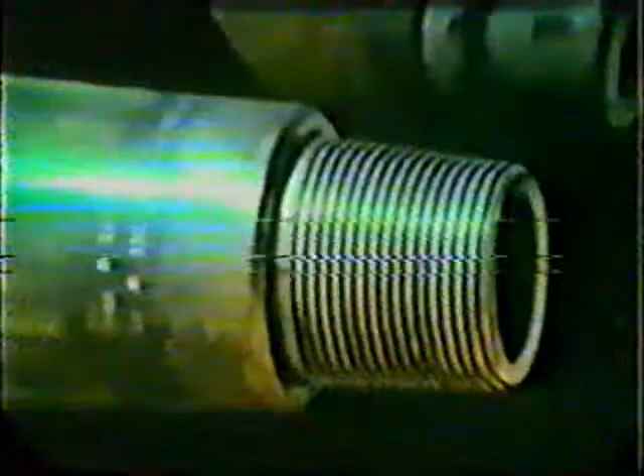You see, drill pipe and drill collar threads are precision equipment. They're often machined to 1/1000th of an inch tolerance. Damage here before the pipe ever gets in the hole probably means a lot of trouble later. So keep those protectors on.

As for unloading, how many of you do it this way? Simply pulling the chocks and letting the pipe roll off the truck is fast, but the pipe can run wild, get bent, or suffer thread damage. Also, it's real easy for somebody to get hurt.

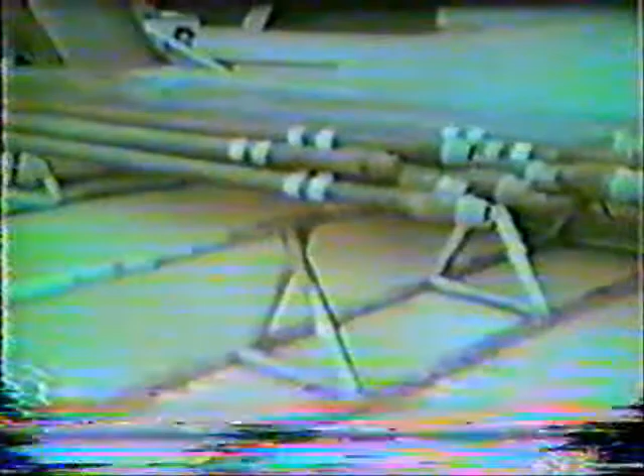Here's a better way. A forklift can pick up several joints off the truck with not too much banging together. All the joints are under control as the operator moves them to the pipe rack. The pipe is lowered to the rack with little chance of damage to the pipe, and the chance of injury to a person is minimized.

The second step in getting longer life from your drill string is clean threads on the tool joints and drill collar connections. A grain of sand or a metal filing can damage the threads. So clean the pin end with a solvent and bristle brush. Don't use a wire brush because it can cause damage.

Once it's clean, really eyeball it for damage.

Also, clean the thread protector before it's put back on the pin. Not a whole lot would be gained by cleaning the threads, only to use a dirty protector. After it's clean, put the thread protector back on.

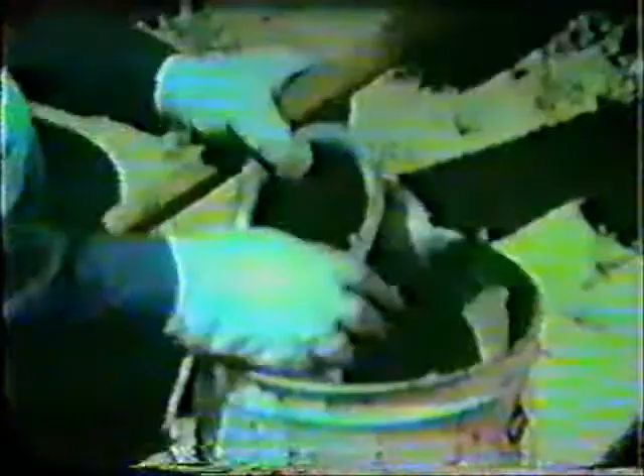Now clean the box end. Again, use a bristle brush instead of a wire brush. And don't forget to clean the box-end thread protectors. Once clean, put them back on.

Next, look for damaged pipe. This joint is as crooked as a dog's hind leg, so set it aside.

But some types of damage can be repaired. For example, this shoulder can be fixed. File the high spots down, removing as little metal as possible. Touch up all the way around to ensure a good, flat sealing surface.

Use a flatness ring to check the shoulder for low spots. Low spots could cause the shoulder to leak, the threads to wash out, and the joint to fail.

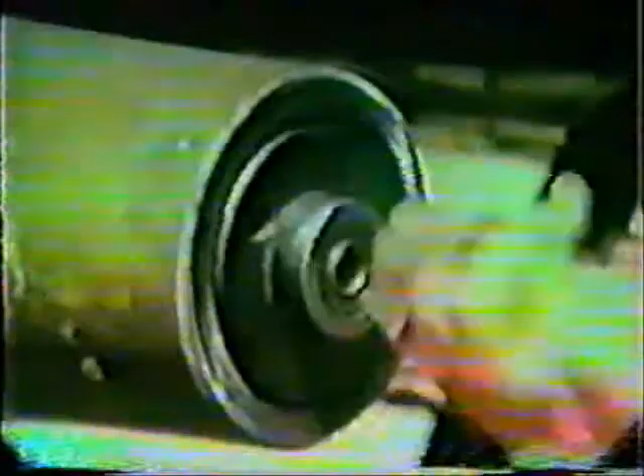You can also use a power grinder on damaged shoulders. First, screw a guide into the box. Then put the grinder shaft into the guide and start the grinder. It's not long before you've got a good shoulder.

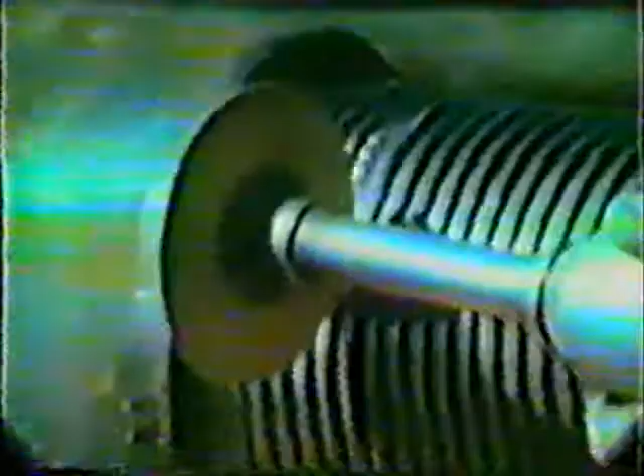This pipe is designed to minimize the problem. Notice the long tool joints and the bulge in the middle. When this heavy wall pipe is placed in the string above the drill collars, it smooths out the whipping action and should reduce failures in this part of the string.

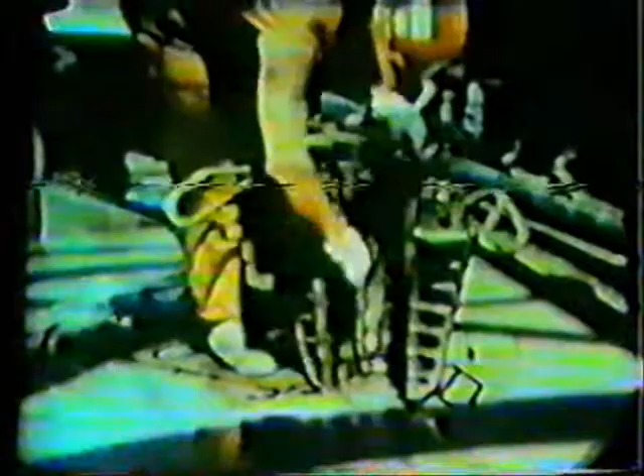Another thing that can prevent pipe damage is maintenance of your pipe handling equipment. Take the slips, for instance. Check them frequently to be sure the teeth or gripping elements are in good shape and properly installed. If the teeth are worn, damaged, or improperly installed, they can score the pipe. This sort of damage can lead to a break and a fishing job.

Also, be sure to use the right size of slips. For instance, if you're running 4.5-inch drill pipe, make sure the slips are usable with pipe of that size. The same thing holds true for the drill collar slips.

Periodically, check the slips. Simply wrap the test paper around the pipe, and carefully set the pipe on the slips. Then pick up the pipe and pull the slips. Look at the test paper. In this case, the even marks on the test paper show that the slips are okay.

After the slip test, check the master bushing. What he's looking for are signs of wear like gouges or worn spots. Here's a master bushing in orange that's in good shape. The slips in yellow evenly contact the sides of the pipe. No problem here. But here, the master bushing is worn. The top of the slips wedge inward and bottleneck the pipe.

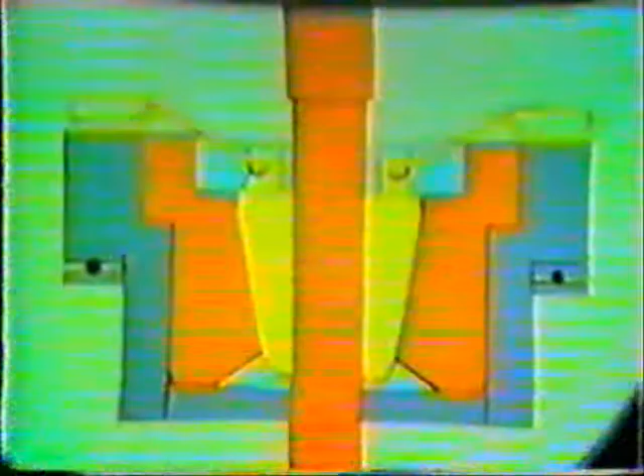Bad news. More bad news can occur if the inside of the rotary table is worn down. So, while the master bushing is out, check the rotary for wear. Here again is a table with everything in good shape. But with a worn table in blue, once again you can get bottlenecked pipe. So it pays to check out your rotary from time to time to get long life from your string.

With your rotary in good shape, and with your pipe and collars clean and inspected, you're ready to go in the hole.

First, make sure the catwalk is clean. You don't want any junk or iron on there that could damage the drill collar. Roll the collar off the rack and onto the catwalk. Notice that the thread protectors are on.

Pick up the collar into the V-door. Be very careful not to let the collar get away from you so it won't hurt someone or get damaged by banging into the rig. Sure glad the thread protector is on.

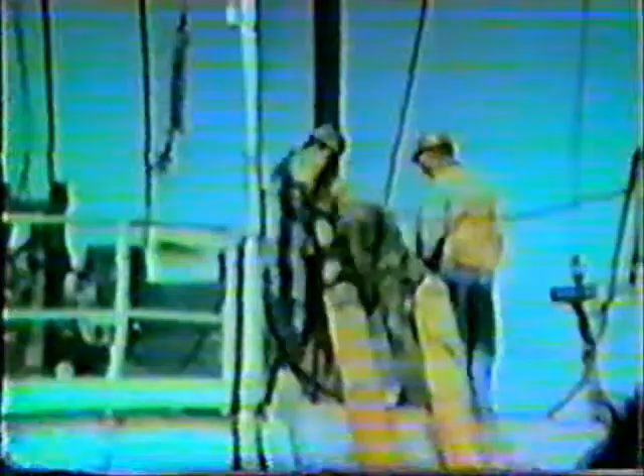With the collar in the V-door, make up a lifting sub. Latch on the elevators and lift the collar onto the floor. A piece of soft line across the V-door helps in keeping the collar under control when it reaches the rig floor.

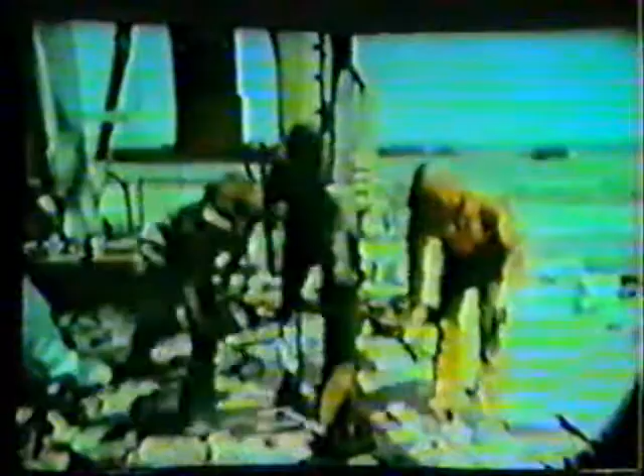After the bit is made up, focus your attention on the best rules to follow when making up the collars. Lower the collar into the hole and set the slips. Attach a safety clamp. The clamp keeps the collars from falling into the hole if the slips fail. Next, break out the lifting sub. As you set it back, use a little care to keep it from being damaged.

Be selective about the dope or thread lubricant you use. This batch has metallic zinc or lead in it to give it body. The dope has to be spread liberally over all the threads and on the shoulder to ensure a good leak-proof joint.

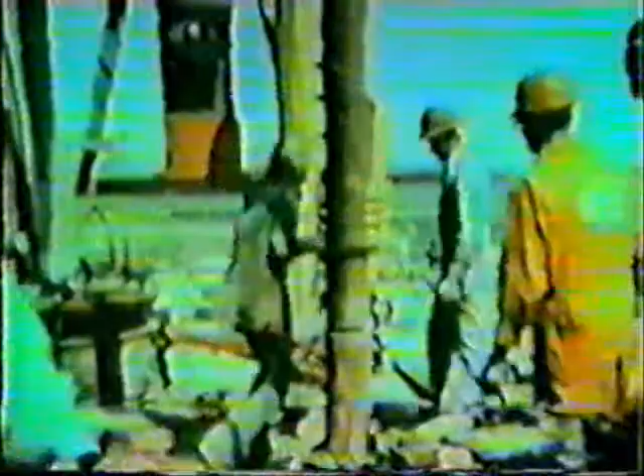Be really careful when stabbing collars. Bouncing thousands of pounds of drill collars together at the joint can lead to trouble. Walk the collars in with chain tongs. This way you don't run the risk of ruining the threads. Using a spinning chain or the rotary to spin up a collar makes it spin too fast and can gall the threads. Of course, to buck up the collar to final torque, latch on the regular tongs.

Exact tightness is important, which is why you should use a tong torque gauge. If the connection is too loose or too tight, the collar could be damaged. When handling drill pipe, the same sort of care pays off too.

For example, when tripping pipe, wait until it stops moving before setting the slips. If you don't, the slips can gouge the pipe and lead to a fishing job.

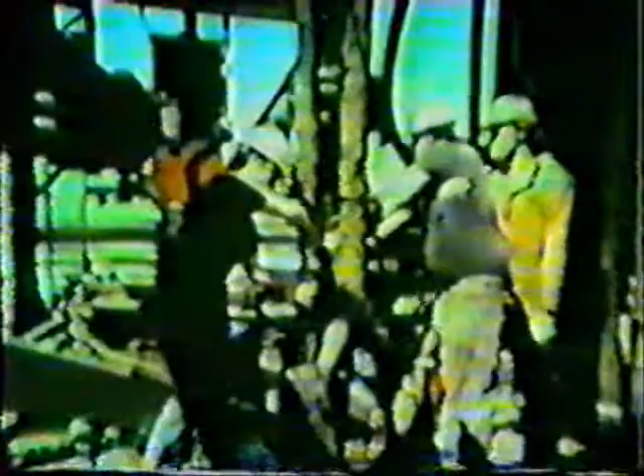Next, dope the joint. And latch on the backup tongs. Be careful when stabbing. Do not drop the pin on the shoulder. Instead, make a good stab with the pin going right into the box.

Spinning tongs are real handy to use to spin the joint up. The makeup tongs are used to buck up the joint to proper tightness. Here again, a torque gauge is real handy in getting the proper makeup torque.

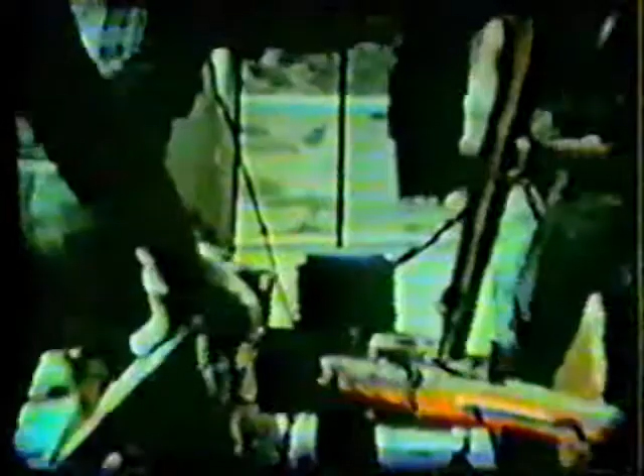Going in the hole, this crew really knows what they're doing. Let's watch. Good, he doped the threads. Good stab. After spinning it up here with a spinning chain, they use both sets of tongs. They don't use the rotary to hold the pipe stationary or to spin it up.

If the rotary were used to spin up the pipe, this is what can happen. If the pipe turns in the slips, it creates deep scars just waiting for a chance to part and create a fishing job.

Be careful, too, when making up the Kelly. For example, worn threads on the Kelly sub can do an awful lot of damage, since the sub mates with every joint that goes in the hole.

If you've handled your pipe correctly, then you shouldn't have any pipe problems downhole as you drill.

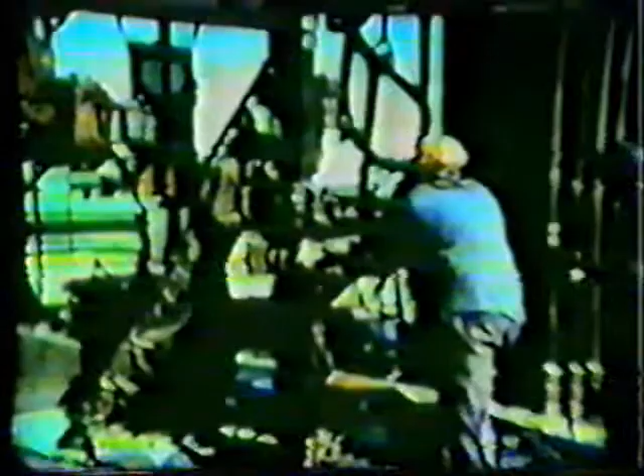When coming out, just as when going in, set the slips only after the pipe stops moving. That was pretty fast, but was the pipe really stopped? Use both sets of tongs to break out a stand. Once loose, spin the joint out.

When the threads disengage, lift the tool joint pin clear of the box and set it back.

Be careful not to let the stand get away from you. Also, make sure the setback area is clean and free of debris that could damage the pipe. Another thing, if you have to move a stand once it's set back, use a special pipe lifting tool to do it. It'll prevent damage to the shoulder.

As you break out the pipe, be kind of like the old Indian scout. Look for signs of trouble. For instance, this joint's kind of hard to spin out.

So the crew cleans the pin to look for problems. And as you can see on the shoulder of the joint and the rotary, the dope was forced out by drilling mud pressure.

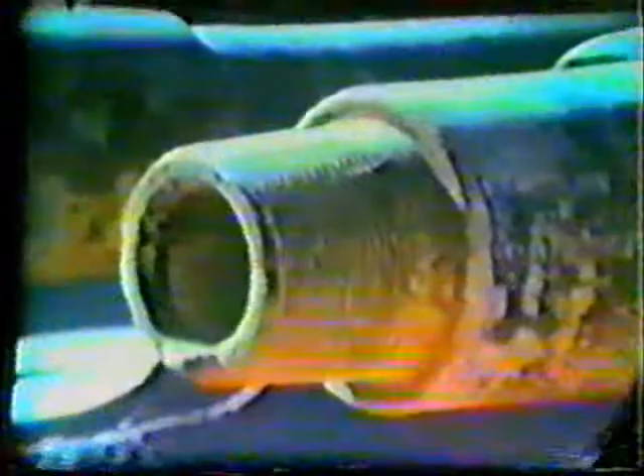This is what could happen, a washed out thread. You can avoid this by making up your pipe and collars to the correct torque.

Here's another sign of trouble. A messed up shoulder. This damage could cause a washout or, worse still, a break. Don't run a damaged joint into the hole.

Here's a stretched pin. You can see that a thread gauge doesn't fit in the threads, a sure sign of stretching. Proper makeup torque prevents this problem.

When the well has been drilled to final depth, take care when laying down the string.

With this laydown system, the pipe is hoisted up and the crew swings it over to rest in a padded bucket.

Then the joint is carried out the V-door and goes down a wire line to the rack, ready for hauling to the next job. Pretty nifty laydown system because it's fast and prevents damage to the pipe as it's being laid down.

So there's no doubt that good handling of the drill stem pays off. With everyone from the drilling superintendent to the tool pusher, driller, and the crew doing their job well, your motto can truly be, no fishing this year.

The term fishing comes from the early cable tool practice of probing with a hook to catch a broken drilling line in hopes of retrieving the drilling tool attached below.

On modern rigs, fishing is the art and science of removing broken or stuck equipment or small non-drillable materials from the wellbore.

A fish can be anything from part or all of the drill string to bit cones, pieces of tools, any material accidentally dropped in the hole, or even small pieces of naturally occurring iron pyrite.

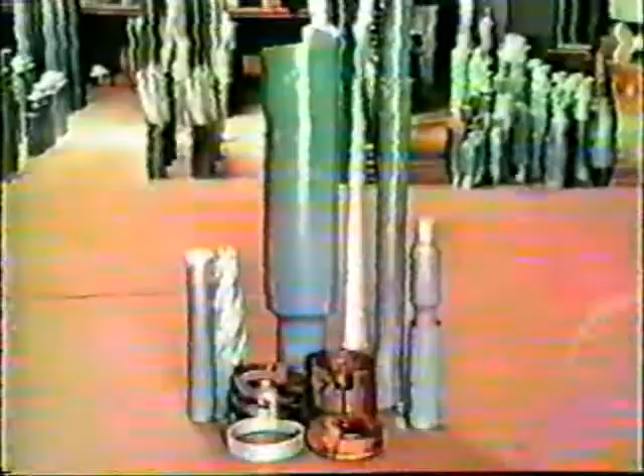There are many types of fishing tools. Which tool to use depends on the kind of fish in the hole and the downhole condition. Every fishing job is unique, and to cover all aspects would take more time than allotted here. So only some of the more commonly used fishing tools and practices will be discussed.

Poor boy junk baskets are just one of the many tools employed to retrieve small pieces of equipment, that is, junk, from the hole. While being rotated slowly and applying weight, the fingers bend inward to trap the junk inside.

The junk sub, or boot basket, will retrieve small pieces of junk. It's usually run just above the bit during normal drilling and milling operations.

The junk is stirred up by the mud stream and rises to the area above the basket. In this area, the mud stream widens, slows down, and can no longer carry the larger pieces. So the junk falls in the cup and is retrieved when the bit's pulled.

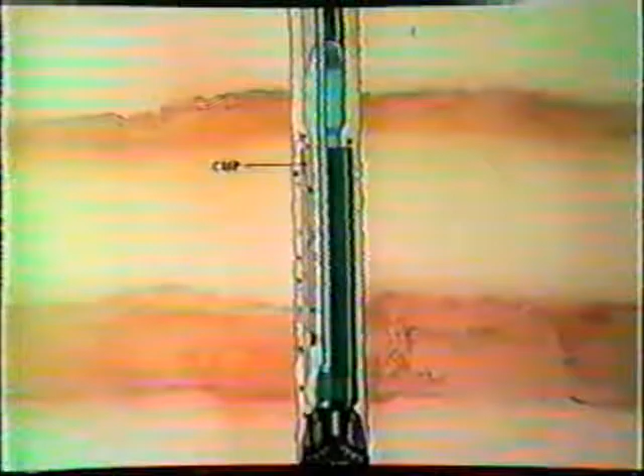A jet-powered junk retriever is more effective when the junk's too large for the cup in the junk sub. The retriever is run to within a few feet of bottom with circulation and rotation to clean cuttings off the top of the junk.

Then a ball is pumped down the drill string. The ball shears a pin to divert drilling fluid out jet nozzles. This action causes a pressure drop or vacuum inside the tool.

The tool is then rotated slowly to bottom and raised and lowered several times to stir the junk up. Finally, it's lowered over the junk. The lower pressure inside the tool causes mud outside to rush in the bottom of the tool and lift the junk. Folding fingers permit only one-way passage of the junk to the inside of the tool.

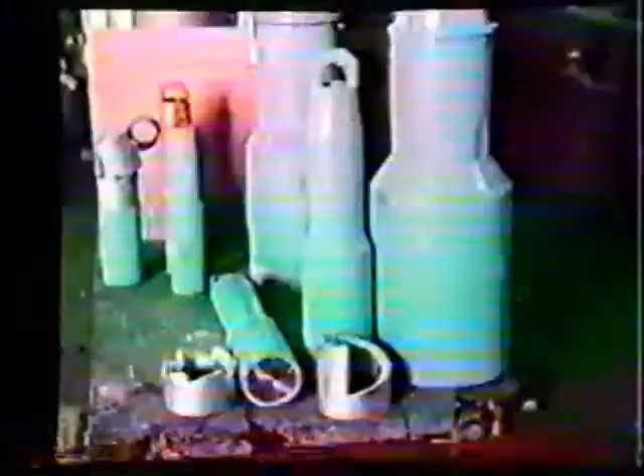Fishing magnets are helpful when small metallic pieces must be retrieved. The permanent magnet picks up junk as cuttings are circulated off the top of the junk.

When junk is large or oddly shaped, a jet bottom hole cutter may be needed. The tool contains a shaped explosive and is lowered to the junk on an electric line. When detonated, high-velocity gases break up the junk, which is then recovered with one of the conventional junk retrieving tools.

A common fishing job occurs when drill pipe parts during drilling. This type of break is called a twist-off, and usually results from metal becoming fatigued due to the constant bending and torquing of the pipe.

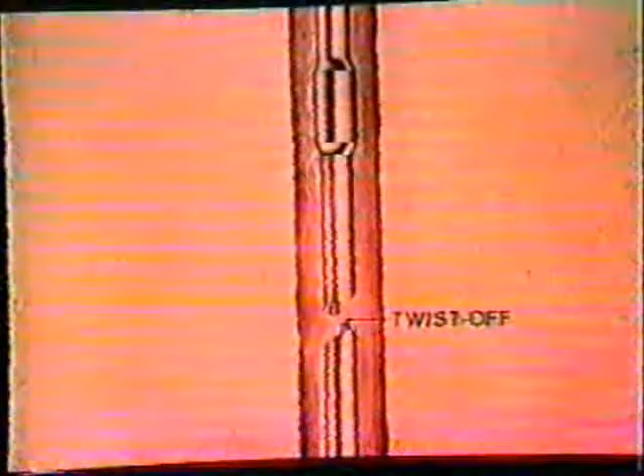When a twist-off occurs, the pipe above it is tripped out and measured. It would be measured under tension while being pulled so that the depth to the top of the fish can be accurately determined. It's not necessary to run an electric log to locate the top. An inspection of the break gives a good reverse image of what the top of the fish looks like.

The top of a burred or split fish should be milled down, preferably to a thicker portion such as a tool joint. It requires great care and exact knowledge of the depth to the top of the fish to prevent the mill from bypassing the fish and damaging the pipe below.

Mill cutting surfaces are inlaid with very hard tungsten carbide. The configuration of these mills gives an indication of how they are used.

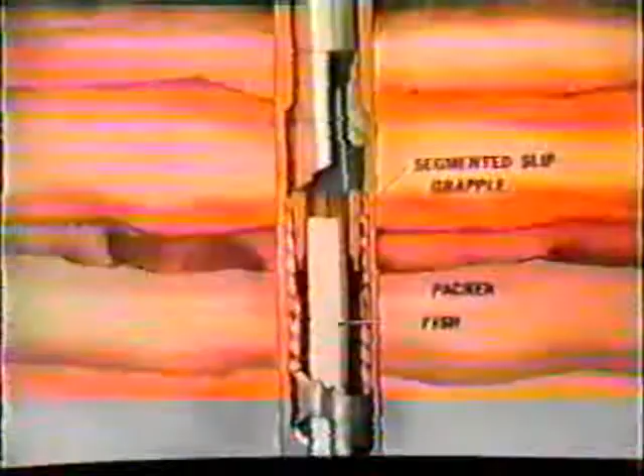When the top of the fish is fairly smooth, a releasing overshot is run below the drill collar string. It should have a large bore so other tools can be run through it and into the fish below. The fish is caught and held by segmented slip grapples, as shown here, or by spring-type grapples. A packer seals between the fish and tool so mud can be circulated through the fish.

The overshot can be released from the fish if the fish is stuck and can't be pulled.

If the fish is burred or flared, it may be necessary to use a mill insert in the overshot to clean up the top of the fish.

Careful measurements are taken to determine how far the fish must extend into the tool before it can be caught by the grapple. The guide helps center the fish under the tool.

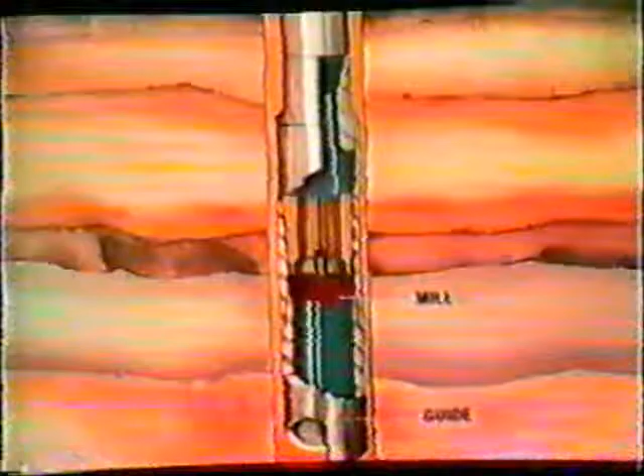It's good practice to run a hydraulic jar with a large bore just above the overshot in case the fish gets stuck during fishing operations. The jar's length should be added to the overall measurement of the fishing tool assembly.

Also, a jar accelerator may be installed above the drill collars to dampen the jarring effect on the derrick and increase the magnitude of the blow delivered to the fish. Accelerators and jars later.

We've now assembled a safe, basic string to fish for parted drill pipe. From top to bottom, there's drill pipe, a jar accelerator, drill collars, a jar, and a releasing overshot.

Catching the fish may be as simple as lowering the overshot with rotation to the right over the fish, then raising it so the grapple will move down to wedge against the fish, and circulated to condition the hole before the fish is pulled out.

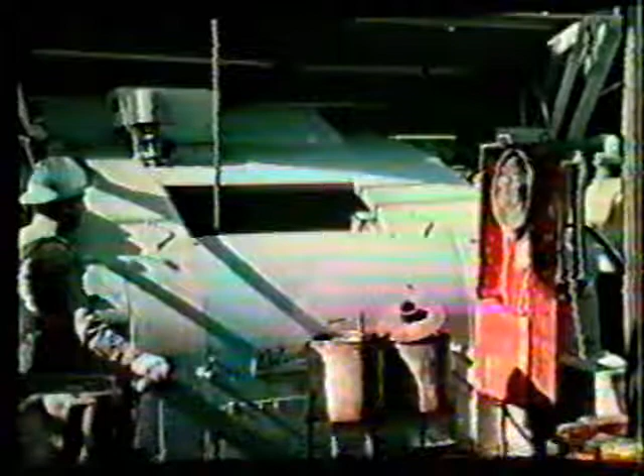On the other hand, it may require hours of patient raising, lowering, turning, and feeling with the fishing assembly. Impatience and rough handling can damage the top of the fish. Under these conditions, accurate measurements taken of the fishing assembly help to determine whether the tool is passing by the fish or if the grapple is not holding.

The problem may be that the fish has parted in a washed-out section of the hole or has fallen behind some obstruction. After a period of fishing with the overshot, it's possible to fairly well determine if this is the case. If so, alterations must be made to the fishing assembly.

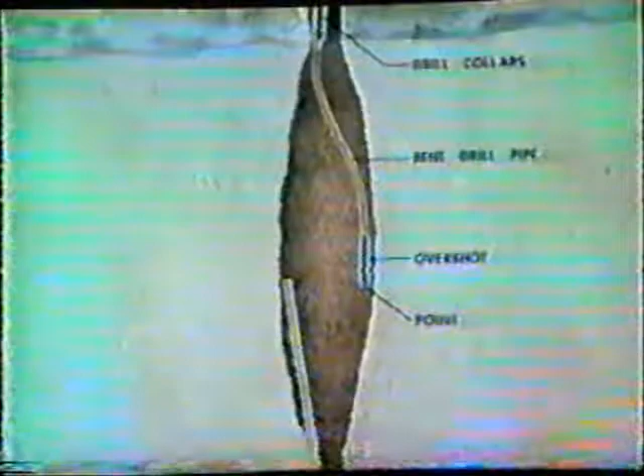The first and least expensive alteration is to put a double bend in a joint of drill pipe and run it in the string between the drill collars and overshot, with the point on the guide to the high side of the bend. By repeatedly raising the assembly, turning it, then lowering it, the entire circumference of the hole can be investigated.

Otherwise, a wall hook guide may be run below the overshot. It's rotated slowly and carefully lowered until it tags the fish. Then the string begins to torque up as a result of the fish binding in the wall hook opening. When this happens, the rotary table is locked and the fishing assembly raised until the torque is released. When the torque releases, the top of the fish should center up under the overshot.

Now the assembly is lowered and the fish engaged by the overshot. Here also, accurate tool measurements help position the assembly for the catch.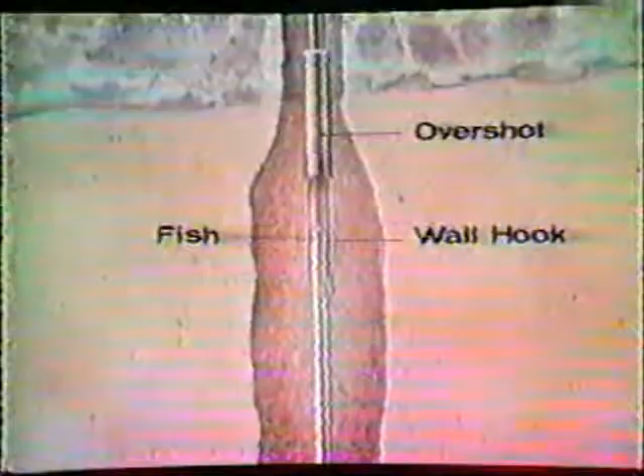If the cavity is very large, a hydraulically actuated knuckle joint may be needed to extend the wall hook and overshot out into the cavity. Most knuckle joints require dropping and pumping down a restriction plug to activate the knuckling action. After the fish is engaged, the plug is retrieved with a wireline overshot.

Once the fish is caught, the hole is circulated clean before starting out of the hole. If circulation can't be fully established, it's almost a sure bet that cavings and cuttings have stuck the fish. Here's where our insurance, the jar and accelerator, pays off.

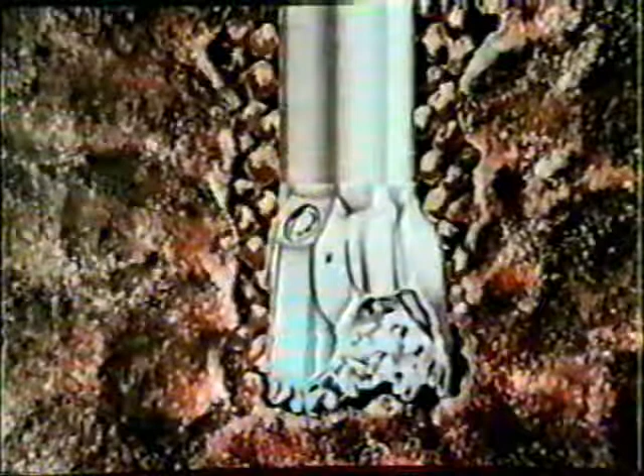Drill collar weights set down on top of the fish to cock hydraulic jars. Then a moderate pull is taken on the fishing string.

Stretching the string compresses trapped gas in the jar accelerator, momentarily storing high-intensity energy. The gas is compressed by the piston as the string is pulled upward.

At the same time, the upward pull on the string causes oil in the hydraulic jar to seep between a piston and sleeve. The sleeve restricts the first few inches of travel, but once the piston is pulled beyond the sleeve, there's little restriction. So the stretch in the fishing string, aided by the compressed gas in the jar accelerator, snaps the drill collar mass upward.

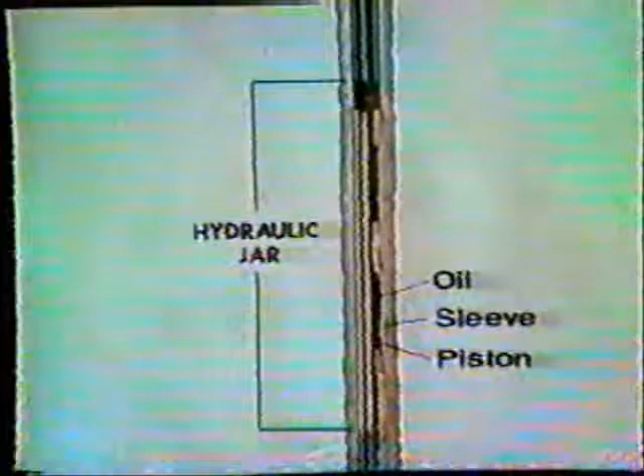Jarring the stuck fish upward when the mandrel knocker strikes the knocker sub. Then weight is again applied to the jar to recock it for another blow.

If jarring doesn't free the fish, the next step is to find out where the fish is stuck. The caution about not running fishing tools with little or no internal restrictions pays off here, because now we must go through them to the inside of the fish to find the stuck point.

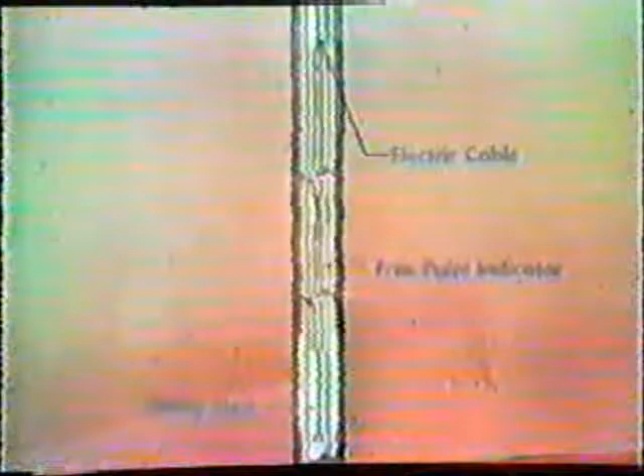A free point indicator with a string shot is run inside the fish on electric cable. At various intervals, the assembly is stopped and the drill string is stressed by applying torque and tension.

When the pipe is stressed, the indicator detects the rearrangement of the pipe's molecules. A surface instrument indicates the change either visually or audibly. The stuck point is the point where no molecular change or stress is indicated.

The string shot is positioned opposite a tool joint, some 1 or 2 joints above the stuck point, and left-hand torque is applied to the drill pipe.

The shot is fired to loosen the joint, and the left-hand torque backs off the upper portion of the drill string. The back-off should always be made a joint or 2 above the stuck point, so enough pipe is exposed to act as a guide and to ensure a clear, clean connection for subsequent fishing tools.

Shot, and then the freed section of the fish are pulled.

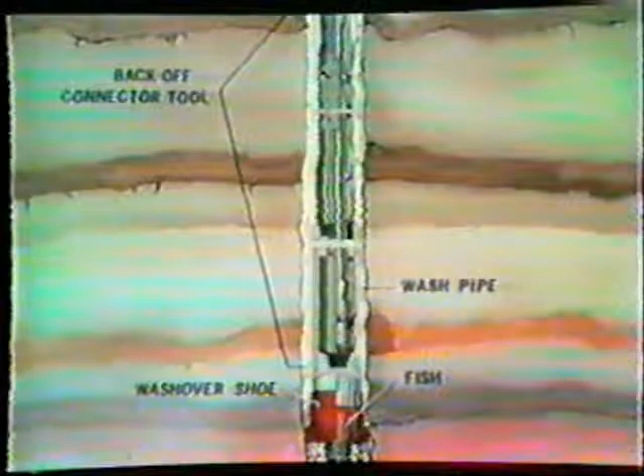To retrieve the rest of the fish, a washover string is run. One type consists of a back-off connector tool and a length of near hole-size wash pipe. A washover shoe is made up on the bottom of the wash pipe and is used for drilling.

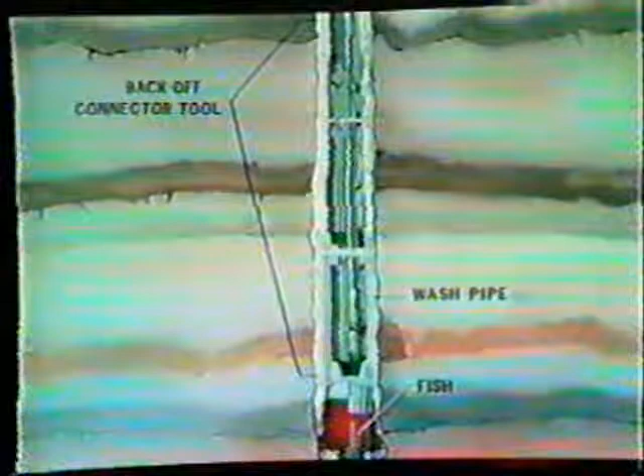The wash pipe assembly is lowered over the fish while rotating and circulating as in normal drilling. Washing over progresses the full length of the wash pipe until the back-off connector tool engages the top of the fish. If all the fish has been washed over, the hole is conditioned and the fish pulled.

If there's still more fish to be washed over, a tool joint locator and string shot are run to a point one joint above the bottom of the wash-over shoe and the back-off is performed. Then the washed over section is pulled. This washover, back-off, and pulling is continued until the entire fish is freed.

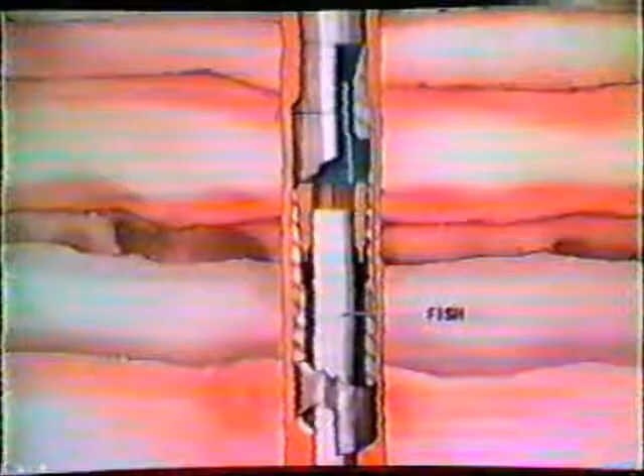Now let's go back to the point where the fish was first caught with an overshot and say that circulation was established, but the fish is stuck and can't be pulled. Probably the fish is wall stuck, because that's the most prevalent type of sticking where circulation is not impeded.

Wall stuck pipe occurs where the hydrostatic pressure of the drilling mud is greater than the formation pressure. The greater hydrostatic pressure moves the drill pipe to the side of the hole and the liquid part of the mud into porous formations, leaving a mud cake that builds up around pipe. This wall cake, plus the differential pressure, can stick pipe.

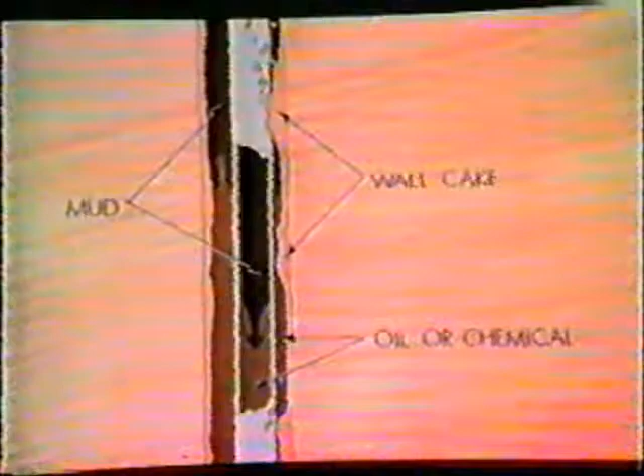Preparations should be made to spot oil or a commercial chemical around the fish, which will penetrate between the pipe and the wall of the hole and break up the wall cake. Usually, the drill pipe is filled with the oil or chemical and moved down the pipe every 30 minutes by a few strokes of the mud pump.

If oil spotting and jarring doesn't free the pipe within about 48 hours, the stuck point is located and the freed portion of the fish backed off and pulled. Then washover operations commence to retrieve the rest of the fish.

If a drill collar parts, the collar string can usually be fished out with an overshot. However, it may be necessary to use a fishing tool that goes inside the fish, should the fish be only a fraction of an inch or so smaller than the wellbore.

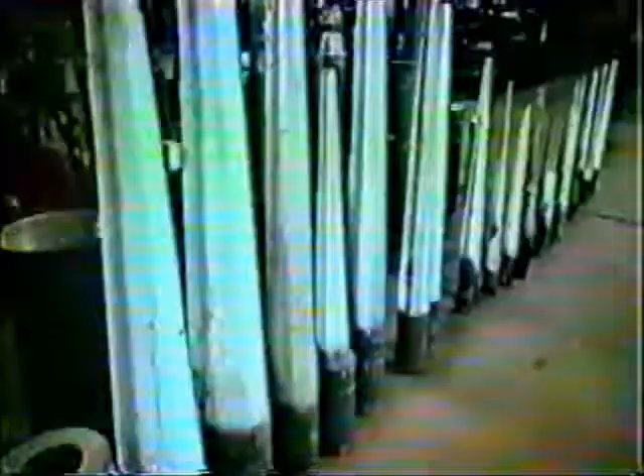The simplest inside fishing tool is the taper tap. Lowered into the collar bore, it's slowly rotated in the proper direction to make its own threads as it engages the fish. Some taps have open tips for limited circulation. None will allow a free point indicator to pass. Also, it should always be run with a safety joint.

A safety joint is a two-piece sub made up with large, specially designed right-hand threads. Rotation to the left, combined with an upward pull on the string, will back it out. With its safety joint engaged, the fish can be pulled.

But if the fish is stuck and jarring doesn't free it, the fishing assembly is broken out at the safety joint and the fishing string pulled, leaving the taper tap and part of the safety joint in the fish. A washover job can be done.

Another inside fishing tool is a releasing spear. It is lowered inside the fish until the bumper ring above the slips contacts the fish. Left-hand rotation, combined with an upward pull, causes the spear slips to expand and wedge into the fish for retrieval. The spear can be released from the fish at any time by applying downward weight and right-hand rotation.

Fishing for stuck pipe does not always occur when the bit is on bottom. Pipe can become stuck off bottom during a trip, or drill collars can be pulled into and stuck in key seats.

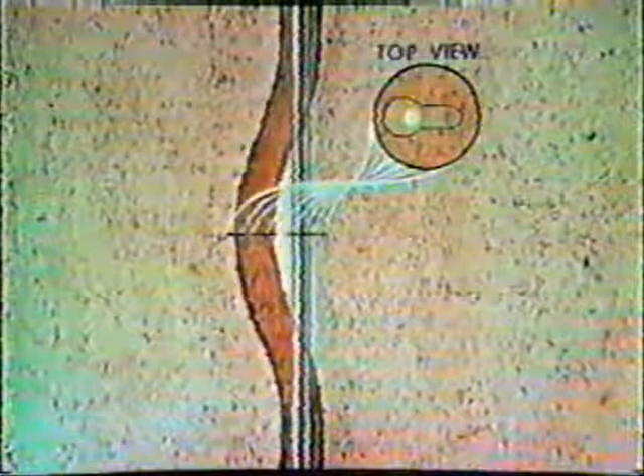Key seating is the result of drill pipe under tension wearing a slot into the wall of a crooked hole. The slot is usually smaller than the main bore hole, and drill collars can't pass through it. If the driller is not careful, he can jam the top collar into the key seat so tightly that any amount of weight applied will not make it drop free.

If this happens, a back-off is made 5 or 6 joints above the stuck point. The back-off is made well above the stuck point so that the top of the fish is in the main bore hole and out of the key-seated portion of the hole. This is done so that the fishing tool can be placed on the fish in the normal part of the hole.

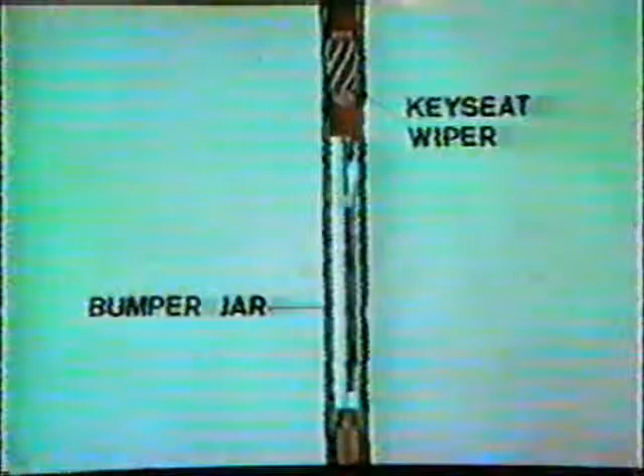Since the fish has an undamaged tool joint looking up, a bumper jar and key seat wiper may be run and made up in the fish. Once engaged, the body of the jar is raised the length of the jar mandrel, then suddenly dropped to strike a downward blow.

Jarring does knock the fish free. The string is lowered with rotation so that the blade reamers on the wiper ream the key seat out. Then the collar string will pass through on the trip out.

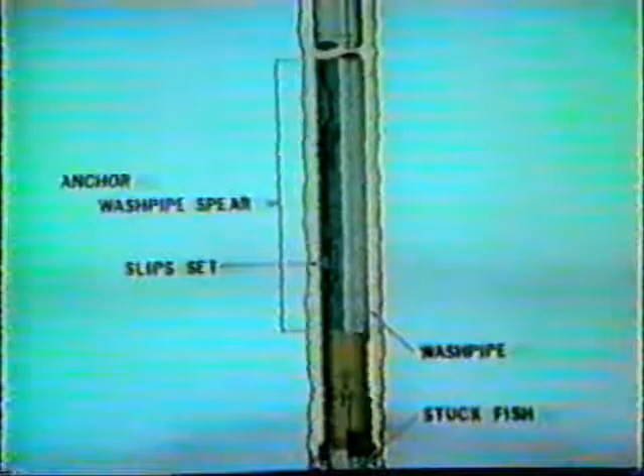If jarring does not free the collar string, it'll be necessary to perform a washover. Since the fish is stuck off bottom, an anchor wash pipe spear can be used to prevent the fish from falling once it's washed free from the key seat. The anchor spear is latched inside the wash pipe by means of slips. It remains latched until it's made up on the fish at the beginning of the washover job. When the spear is made up on the fish, the slips release from the wash pipe. Washing over continues until the fish falls free. When this occurs, the slips again expand to grip the interior wall of the wash pipe to prevent the fish from falling out of the wash pipe to the bottom of the hole.

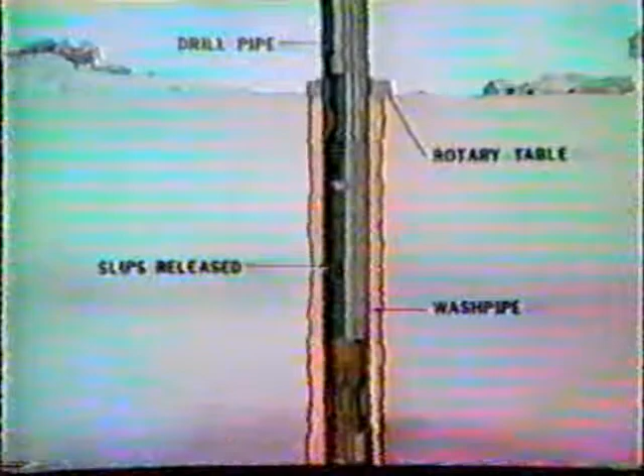If the entire fish can't be retrieved in one washover job, then a back-off is made above the stuck point and the wash pipe is set in the rotary table. Drill pipe is run down to and made up on the spear. The spear is raised to release the slips, and the spear, with the backed-off portion of fish attached, is pulled out of the wash pipe. The wash pipe remains in the hole, and the spear can again be run to retrieve the rest of the fish.

Sometimes, after a back-off has been made above the stuck point and the freed section of pipe pulled, the inside bore of the fish, still in the hole, may become plugged by cavings and settlings. This makes it impossible to go back inside the fish to make further back-off and pulling operations. Should this happen, a drill-out tool can be used to reopen the fish.

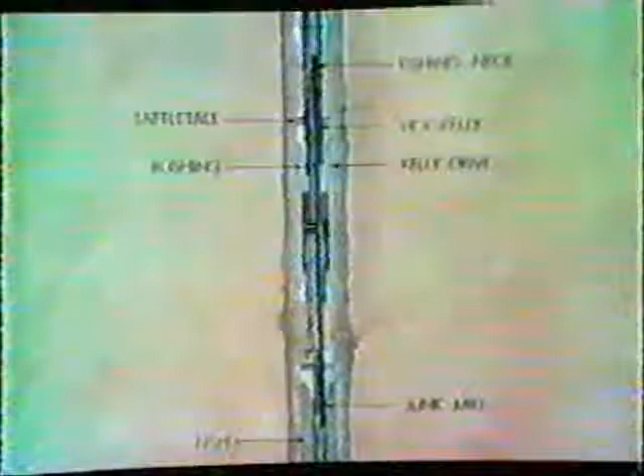The drill-out tool is run to the top of the restricted fish and made up on it. A hex kelly is run in on wire line. It is inserted through a self-aligning bushing which is built into the kelly drive. Rotating the drill string causes the kelly and mill to rotate also.

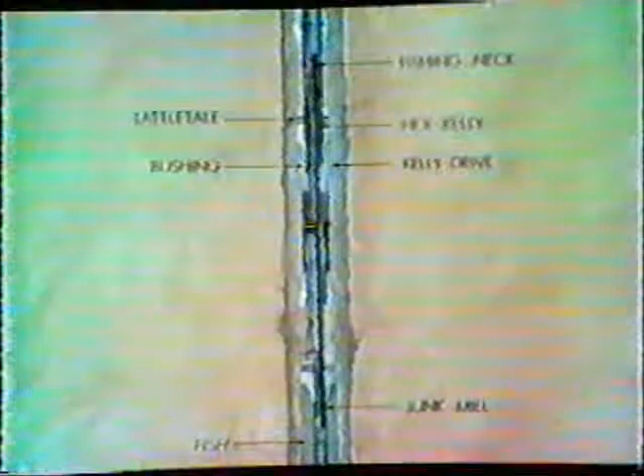Pump pressure is applied to wash the cuttings and apply weight on the mill. When the kelly has drilled all the way down, drilling fluid will exit through the tattletale and cause pump pressure to drop. If there's more debris to be cleaned, the kelly can be retrieved by wire line and a pup joint, or short length of drill pipe, made up between the kelly and mill. This assembly can then be run back in and milling resumed until the restriction is removed. Then the mill and hex shaft are retrieved with a wire line overshot, leaving behind the outer case of the tool still attached to the fish. Normal back-off procedures can be performed to retrieve the rest of the fish.

If a drill-out tool isn't available, a plugged fish can be retrieved with an external cutting tool. The cutting tool is run on the bottom of the wash pipe. Enough wash pipe is used to get below the obstructed fish. During the washover, the cutting tool is slowly raised until a bottleneck, or as in this example, spring dogs, engage a tool joint. Then a strain taken on the drill string moves the knives into cutting position. The tool is rotated slowly under strain until the cut is completed. Then the wash pipe, cutter, and blocked portion of the fish are pulled.

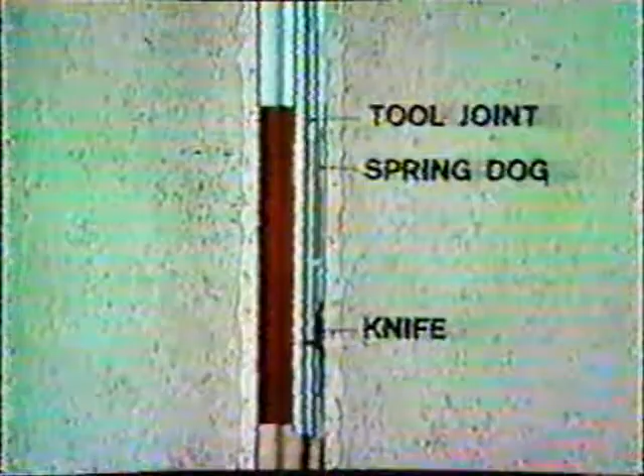When logging tools or similar wireline instruments become stuck in the hole, cable-guided fishing can be used to retrieve the cable and instrument. One cable-guided fishing assembly consists of a regular overshot made up on drill pipe and a rope socket, sinker bar, and spearhead overshot attached to the upper part of the cable. A spear point rope socket is attached to the lower part of the cable. A cable hanger is attached to the cable to prevent it from falling down the hole, since it's necessary to cut the cable to install the rope assembly.

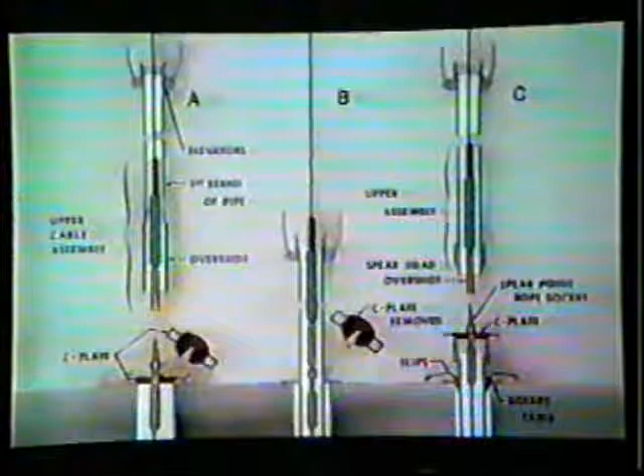In use, the upper cable assembly is threaded through the inside of the first stand of pipe and overshot, while a C-plate keeps the lower part of the cable suspended in the hole, as at A. Then at B, the upper cable assembly is attached to the lower assembly, the C-plate is removed, and the first stand run in. After the C-plate is replaced at C, the spearhead overshot is released from the spear point rope socket, and the upper assembly is threaded through the next stand of pipe. This process continues until the overshot engages the fish.

Once the fish is caught in the overshot, the cable is pulled out of the fish at a safety splice above the fish and reeled to the surface. Finally, the fish is pulled in the conventional manner.

When a wire line, rope, or cable is dropped into a rotary drilled hole, the old reliable rope spear can be used to retrieve it. By jamming the spear into the mass of rope, the rope will be snagged and caught by the barbs. Then the rope and spear are retrieved.

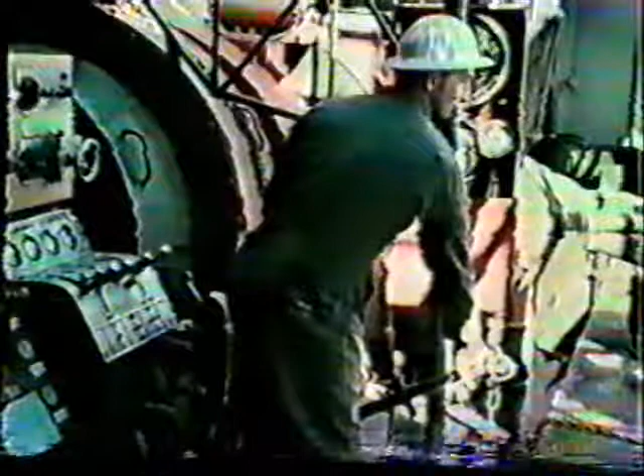If allowed, some fishing jobs could go on for days and even months before the fish is successfully retrieved. However, there's a point where fishing must stop, and this is determined by economics. The accumulative daily fishing costs should be continually compared with the cost of replacing the tools and of sidetracking and redrilling. Once the fishing costs reach approximately 50% of the cost of sidetracking and redrilling, fishing should be abandoned.

Remember that the proper tools are not always available, and that the best tools and procedures sometimes fail. But close adherence to the methods outlined should result in a high percentage of success.

The term fishing, as applied in the oil industry, refers to the operation of removing broken or stuck equipment or any non-drillable object from the bore of a well. The term originally applied to the early cable tool practice of probing in the hole with a hook or a spear to catch a broken drilling line.

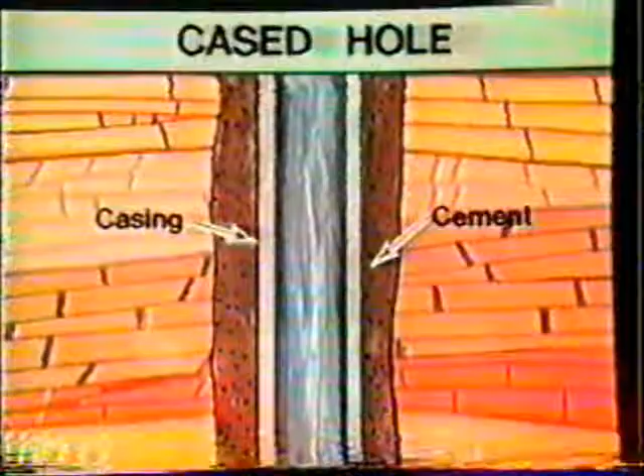Cased holes are normally wells that have been completed and capable of producing oil or gas. A common problem is stuck tubing due to sand fill or contaminated mud in the annulus. This must be cleaned out to remove the tubing and repair the well in order to obtain further production.

Many fishing tools and techniques are available today which permit a variety of solutions to specific fishing problems. The proper tool and technique to use depends on the type of fish to be retrieved and on the downhole conditions.

Cased hole fishing usually involves smaller diameter tools and lighter loads than open hole fishing, and the fishing string is frequently tubing which will not take the rough treatment and the heavy torque imposed on the drill pipe used in open hole fishing.

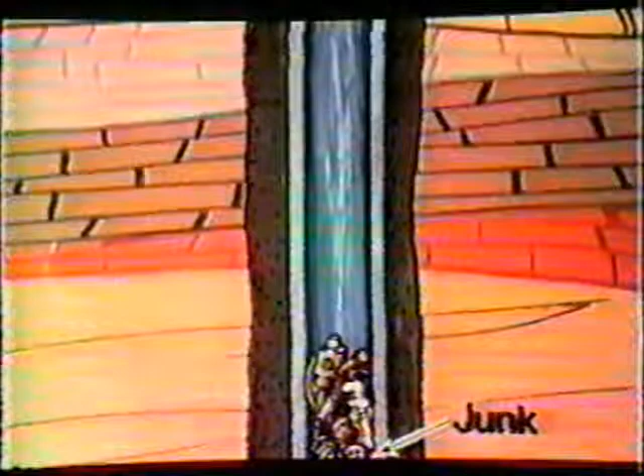Loose junk is a particularly hazardous problem in cased holes because of the close clearances between the casing and the inner string. Junk may be bit cones or pieces of other tools left in the hole as a result of tool failure, or any undesirable material such as hand tools accidentally dropped in the well.

The Poor Boy junk basket is the simplest tool to use to recover loose junk inside open or cased holes. The basket is run in and rotated slowly as it is lowered to bottom. As weight is applied, the fingers will bend inward to trap the piece of junk inside and thus be recovered from the hole.

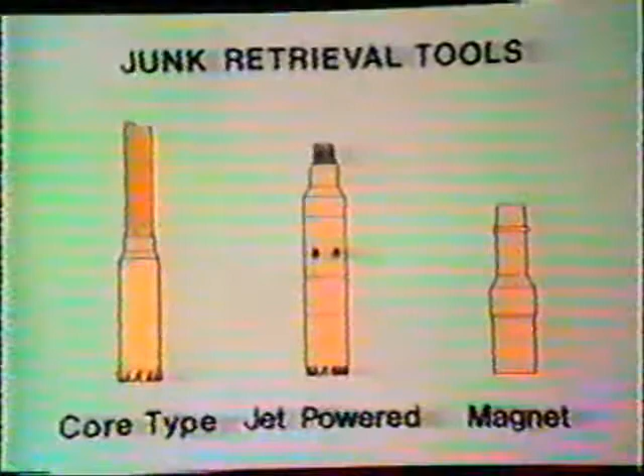There are a number of special tools for recovering loose junk from a well. These include the core type and jet-powered junk baskets and the magnet retrieval tool.

The core type junk basket has a cutting head that is used to cut a short core of the formation which is recovered along with the junk. Both the core and the junk are held inside the body of the tool by one or more catchers.

The jet-powered junk retriever is effective in removing large pieces of junk. It works by producing a high-velocity jetting action which lifts the junk into the retriever from the bottom of the hole.

The tool is run to bottom and a ball is dropped into the drill pipe. When the ball seats in the piston, pressure increases and forces the piston downward. This diverts the fluid flow to the jet nozzles to create, in effect, reverse circulation into the bottom of the tool. The Venturi effect of fluid flow through the jet nozzles causes fluid to flow from the annulus into the tool. This carries the junk into the retriever. Junk that enters the tool is caught and held by the retaining fingers.

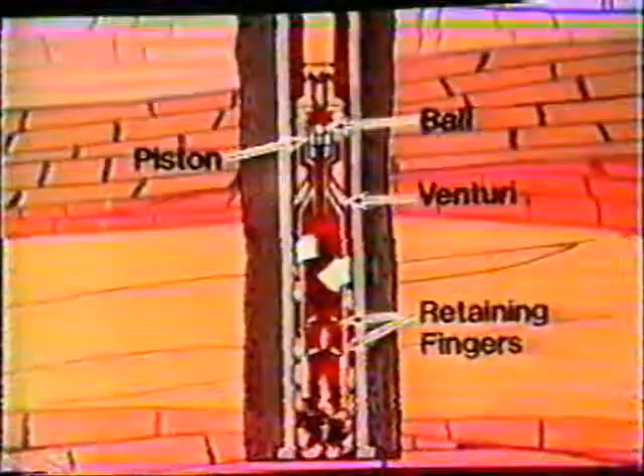The hydrostatic junk snatcher also uses reverse fluid flow to force debris and junk into the junk basket. Differential head between fluid inside the drill pipe and the annulus causes reverse flow when the trip valve is opened. The jar section is used to strike the downward blow needed to open the trip valve.

When the trip valve is opened with the tool on bottom, hydrostatic pressure of the fluid column outside the tool will force fluid to flow into the junk basket. Velocity of the fluid will carry loose material into the basket, where it will be held by retaining fingers.

A permanent magnet may be used to pick up metallic junk. It is important to circulate first to wash away cuttings that would prevent contact with the magnet.

Rope, wire line, armored cable, and similar items which have broken and fallen to the bottom of the hole may be recovered with a rope spear or grab.

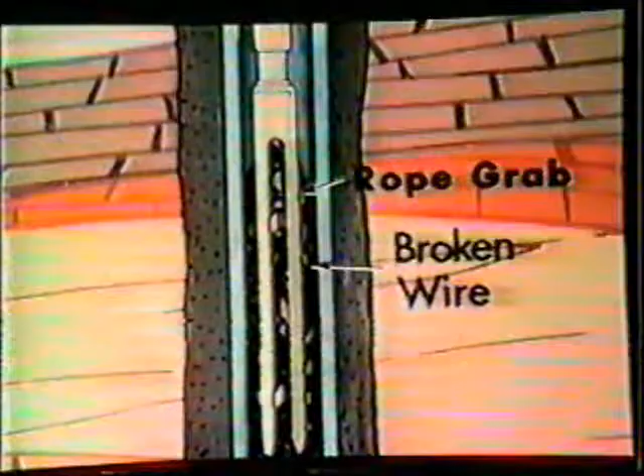A standard fishing assembly consists of a catch tool, in this case an overshot, bumper jars, oil jars, drill collars, and accelerator jars.

The bumper jar is an expansion joint which permits limited vertical movement of the upper part, the mandrel, without moving the lower part, the barrel.

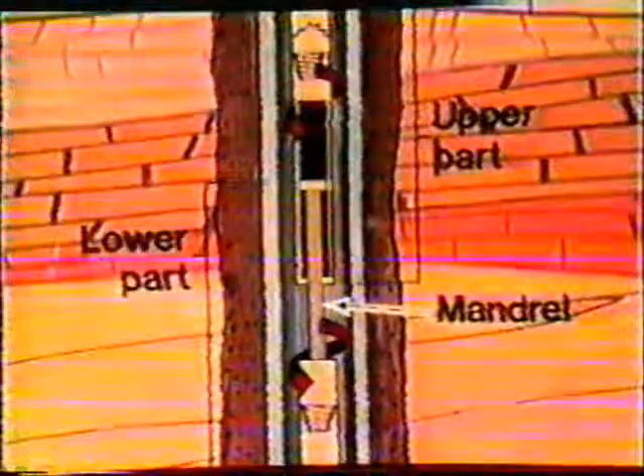The splined mandrel forces the lower part of the bumper jar to turn as the upper part is turned. A slight jarring action can be obtained when the upper part is raised to the limit of its travel. Dropping the string quickly will produce a sharp downward jar on the lower section of the tool. In some cases, this jarring action may free a stuck fish.

A string of pipe which has parted in the hole may be relatively simple or extremely difficult to retrieve, depending on downhole conditions. Pipe which has separated or twisted off because of metal fatigue from the constant bending of the string is often free in the hole.

The solution may be simply to engage the top of the pipe with a catch tool and to pick it up. If the top of the fish is uneven or has a jagged edge, it may be necessary to smooth the end with a milling tool to permit engagement by an internal or external catch tool.

The condition of the top of the fish may be determined by inspection of the break on the pipe that is retrieved from the hole, or by running a lead impression block.

The impression block is a block of soft lead run on drill pipe or tubing. The fish top will make an impression in the block, which will give an indication of the condition of the top of the fish.

A flat bottom or concave bottom mill can be used to smooth off the top of the fish. Cutting is accomplished by means of fragmented tungsten carbide chips that are embedded in a strong but flexible matrix bonded to the steel body of the mill.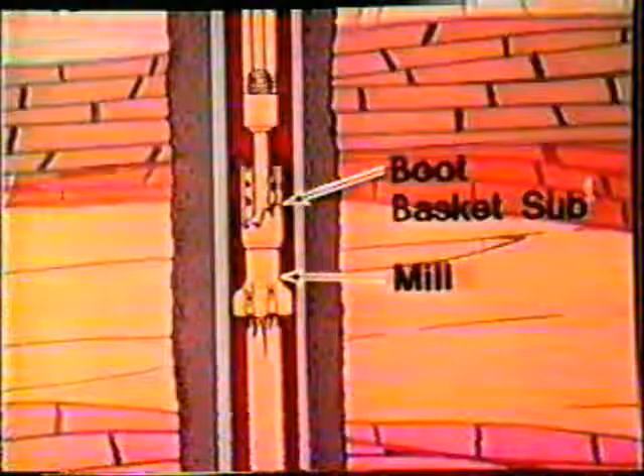A boot basket sub should be run above a milling tool to collect metal cuttings created by milling. Steel particles carried up by the circulating fluid will drop into the boot basket when the fluid velocity decreases above the tool.

An effective tool to catch the outside of a fish is a circulating and releasing overshot. In the grapple-type overshot, a spiral grapple is employed to catch the fish. A rubber packer seals around the top of the fish to permit circulation. Most overshots can be released by right-hand rotation of the run-in string.

Basket-type overshots, instead of the grapple type, are also available. A basket overshot generally requires more outside clearance than the spiral grapple type for a given size fish.

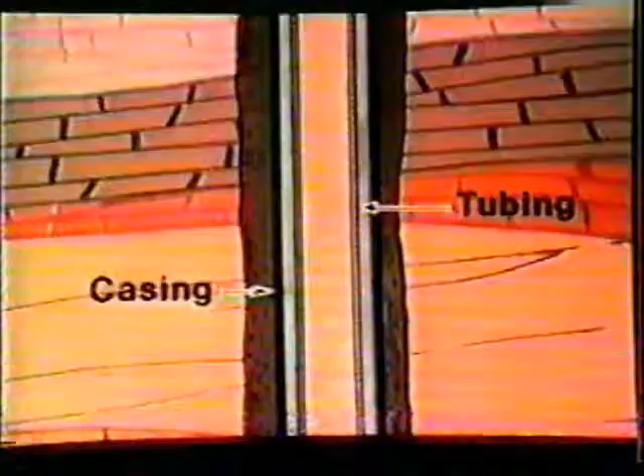If clearance between fish and casing is too small to permit use of an overshot, an internal catch tool may be used. An effective internal catch tool is the releasing spear. The spear provides positive internal engagement of the fish and is releasable.

Several types of spears are available, most of which are equipped with pack-off devices to permit circulation through the fish. The taper tap is also used to engage a fish internally. The taper tap employs sharp carburized cutting threads to engage the fish.

If the fish has parted at a connection and its threads are still intact, it may be engaged with a pin tap. The pin tap is merely a connection with threads like the pipe or tubing being used.

In rare conditions, a safety joint may be run as part of the fishing assembly. While not recommended, in some cases it may be necessary to provide a back-off joint from the fishing assembly. Under most conditions, a back-off joint can be made with a string shot or jet cutter.

A safety joint usually consists of two main parts. The lower section stays on the fish and can be re-engaged for subsequent fishing operations. The upper section, when disengaged, is recovered with the fishing string.

To recover a fish, the fishing tool assembly is run into the hole until the catch tool, in this case an overshot, contacts the fish.

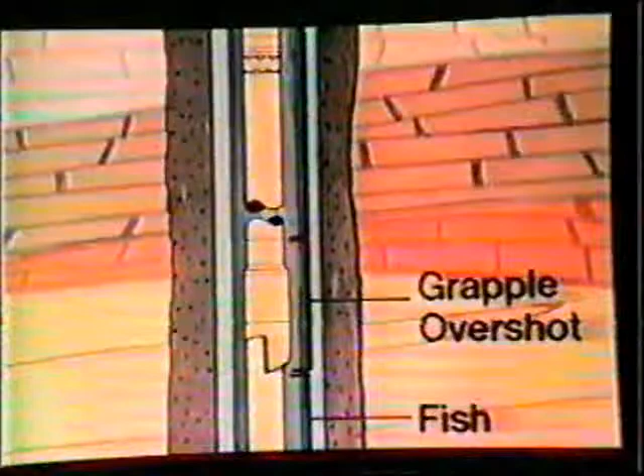The run-in string is then rotated to work the tool over the fish, and the string is lowered. The fish is then engaged, and circulation, if desired, is started. The fish is free, as determined by additional weight when the string is raised. The fishing string and fish are pulled out of the hole.

Removal of pipe or tubing, which has become stuck in a well, requires more precise methods and specialized equipment. Tubing often becomes stuck in a cased hole because of a stuck packer, contaminated mud, sand, junk, or perhaps a combination.

If the string has not been parted, and unless experience suggests otherwise, it is always best to work and attempt to circulate a stuck string of pipe before beginning fishing operations. Pulling stretch in the string and working the pipe with pump pressure applied may free the whole string of tubing.

Well records should be checked. It is absolutely essential that the fishing tool operator knows the condition of the well and the size, weight, and grade of tubing, as well as details of tools in the hole. Depth measurements are most important. Pipe stretch can be used to estimate or calculate depth to the stuck pipe.

The stuck point may also be located with an electronic free-point indicator, available in sizes as small as 1/2 inch in diameter. The indicator is run inside the tubing or drill pipe on a wireline conductor, which transmits electrical impulses to instruments on the surface.

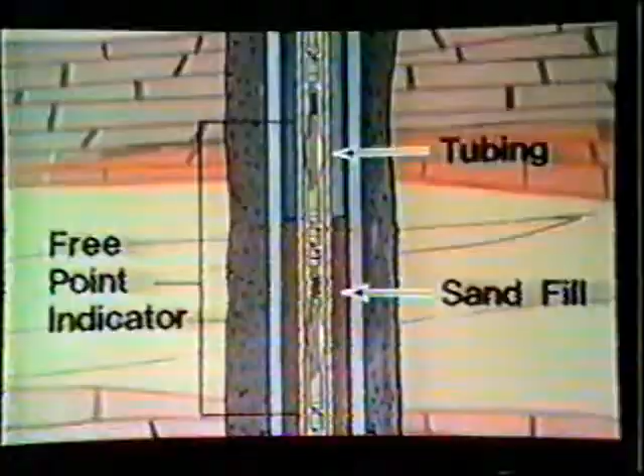The stuck string of pipe is stretched up and down while observations of these impulses are being made. The free-point indicator is extremely sensitive and will permit observation of microscopic movement or molecular stress in the string above the stuck point. As the tool goes below the depth at which the string is stuck, electrical indications of pipe movement cease. The depth of the free point is determined by measurement of the conductor line.

If circulation cannot be established, it may be desirable to perforate the tubing near the stuck point to permit circulation. But first, the tubing record should be checked for the presence of a circulating valve, which may be opened by a wireline tool.

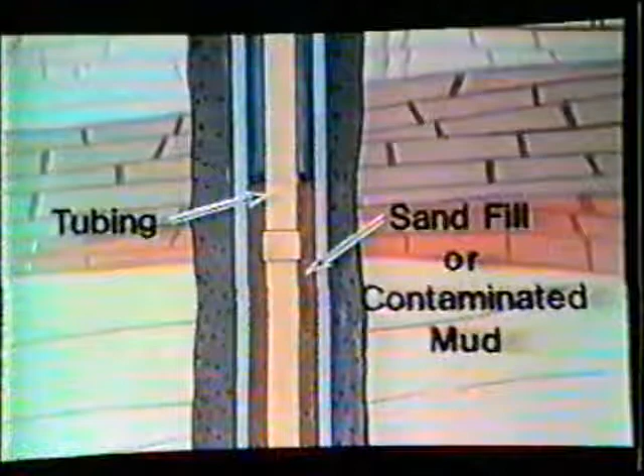If the drill string is stuck, it may be necessary to run a wireline string shot and back off. This is accomplished by holding left-hand torque on the stuck drill string at the surface and detonating an explosive charge to cause a coupling to unscrew, thus parting the string of pipe.

The string shot, which may be run with a free-point indicator, is a length of primacord explosive detonated by an electrical cap. The string shot is run on a wireline conductor cable with a collar locator to establish the location of the tubing joint or coupling.

As left-hand torque is applied to the string and held at the surface, the string shot is detonated at least 2 joints above the stuck point. The jar of the explosion will cause the threaded connection to unscrew. As explosives are used, this operation is hazardous and should be attempted only by specialists and experienced personnel.

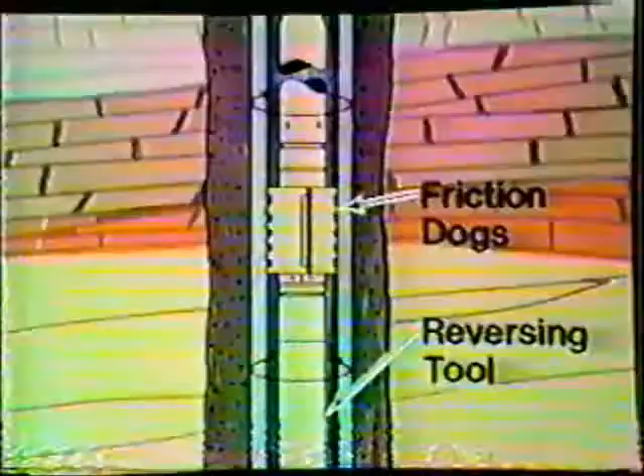Back-off may also be accomplished by using a reversing tool. The reversing tool is a device which provides a means of reversing the direction of rotation of the string below it and eliminates the need for a complete string of left-hand pipe. The reverse rotation is accomplished by a planetary gearing system.

The tool is anchored by friction dogs engaged on the casing walls so that right-hand rotation of the working string above the reversing tool will produce left-hand rotation of the string below. The fishing string is made up with a catch tool below the reversing tool to engage the fish. When the overshot has firmly engaged the fish, the anchoring device is activated and right-hand rotation is begun. When back-off is accomplished, the rotary will spin free. The fishing assembly can then be pulled out of the hole with one or more lengths of pipe.

It is often necessary to cut a section of pipe or tubing in order to remove it. Among the cutting tools available are chemical and jet cutters, which are run on wireline conductors, and internal or external cutters that are run on pipe.

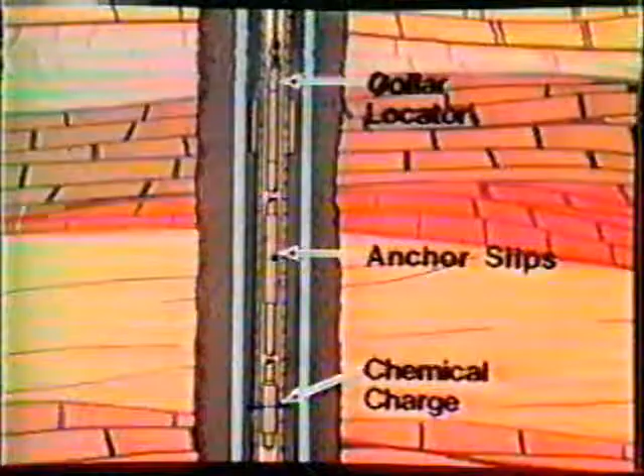The chemical cutter uses a powerful blast of hydrofluoric acid to cut the pipe. It is run into the well on a wireline conductor and activated from the surface. A shaped charge or jet cutter is also run into the well on a wireline conductor, but uses an explosive charge to cut the pipe.

External or internal cutting tools are run into the well on a string of pipe. They employ hardened knives to do the cutting. The knives can be actuated by weight or hydraulic pressure.

After the pipe above a cut or back-off has been removed, it is then possible to start operations to free the section of pipe that is actually stuck. In many instances, a stuck string of pipe can be freed by an upward jar. If the stuck pipe cannot be loosened this way, it may be desirable to run a string shot through the fishing string to back off part of the stuck fish.

A hydraulic jar is used to obtain a sharp upward blow on a stuck fish. It is composed of a sliding mandrel and piston assembly that works inside a cylinder containing hydraulic fluid. Tension is applied by raising the string, and the mandrel piston moves upward in the cylinder. This upward motion is initially impeded by a restricted area in the metering section of the tool.

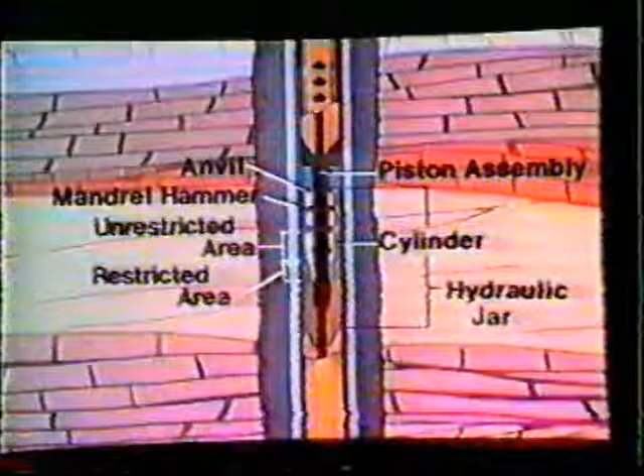When maximum stretch of the run-in string is reached, the mandrel piston reaches the end of the restricted section and moves into the unrestricted area of the cylinder. It is suddenly released, permitting the mandrel to travel upward at high velocity, and the mandrel piston or hammer strikes the top of the cylinder with an upward blow of very high impact.

The accelerator jar is optional, but may be used to greatly increase the impact of the blow delivered by a hydraulic jar. An accelerator jar between a jar and the fishing string will intensify the upward jarring effect on a fish. Upward pull on the string will compress the nitrogen gas in the accelerator jar as the mandrel in the hydraulic jar begins its movement.

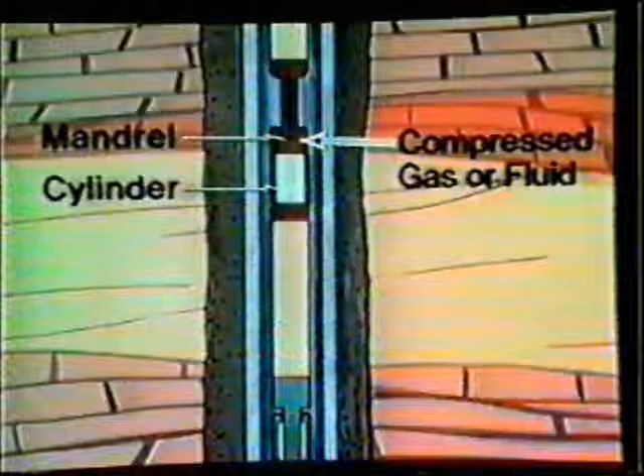When the mandrel in the jar reaches its free point and is released, the compressed gas above the piston in the accelerator jar expands. This permits the drill collars to travel upward at an accelerated rate, and the hammer of the jar will hit the anvil a very hard blow.

The hydraulic pulling tool provides another means of exerting an upward pull on a stuck string. In contrast to the hydraulic jar, the hydraulic pulling tool provides a strong, steady pull on the fish. The assembly of tools to run a hydraulic pulling tool will include a catch tool, an overshot in this case, safety joint, bumper jar, and the hydraulic pulling tool.

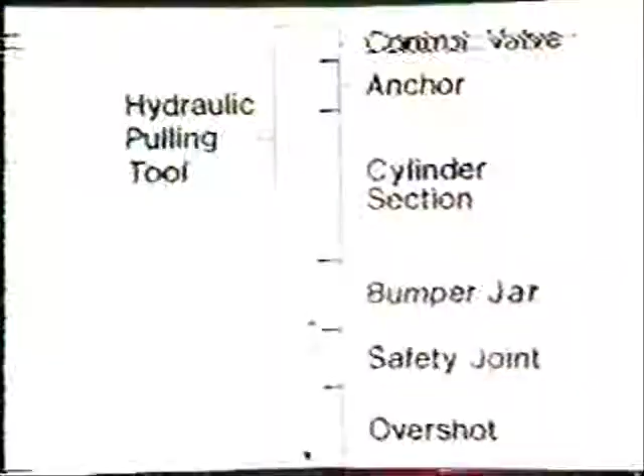Note that the cylinder section is below the anchor and control valve. The hydraulic pulling tool has three sections: the pulling or cylinder section, the anchor section, and the relief or control valve. The tool is anchored to the casing, thus a strain on the upper fishing string does not take place when a pull is being made.

High-pressure fluid applied to the pistons in the pulling section causes an upward pull on the fishing string below. Hydraulic pressure is obtained from a special high-pressure pump on the surface.

If the fish cannot be quickly freed by jarring or pulling, it will be necessary to begin washover operations. Washover pipe is used to go down over the tubing or drill pipe, cut a clearance between the fish and the casing, and by circulation remove the sand or other material surrounding the fish.

The leading edge of the rotary shoe is fitted with fragmented tungsten carbide for cutting and has side openings to permit circulation. Several designs are available for milling both inside and outside. A shoe should be selected that will not damage the casing.

The washover string is lowered over the fish and rotated using normal circulation. The rotary shoe cuts through the sand, contaminated mud, or other debris, which is then carried to the surface in the circulation fluid. When the fish is washed over, the washed-over section is ready for recovery.

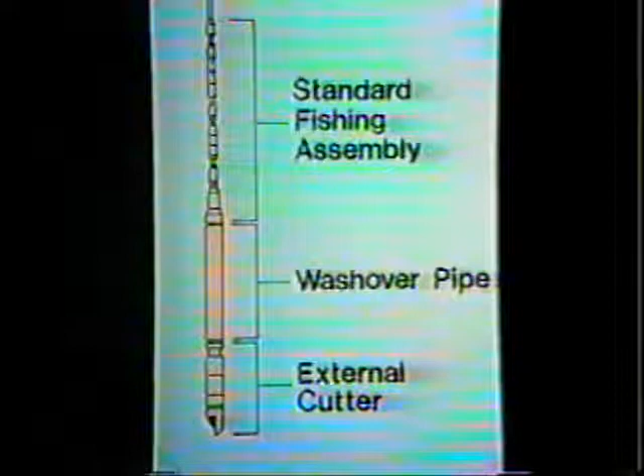Recovery may be accomplished in various ways. One method makes use of an external cutter instead of the washover shoe. After washover, the external cutter is used to cut the fish. The fish is then caught with an overshot in the cutter assembly.

Terminal fishing refers to the operation of totally milling up or otherwise fragmenting objects left in the bore of a well. Some packers, for example, are constructed so that they may be removed in this manner.

There are several mills available for terminal fishing, but in cased holes, the mill selected must be constructed so it will not damage the casing. The fishing string should include a junk basket to collect the debris produced by milling and a guide to center the fishing string in the hole.

We have covered most of the major cased hole fishing tools and some of the most commonly used fishing techniques. But each fishing problem is unique, and the methods covered in this program are frequently modified to meet specific requirements.